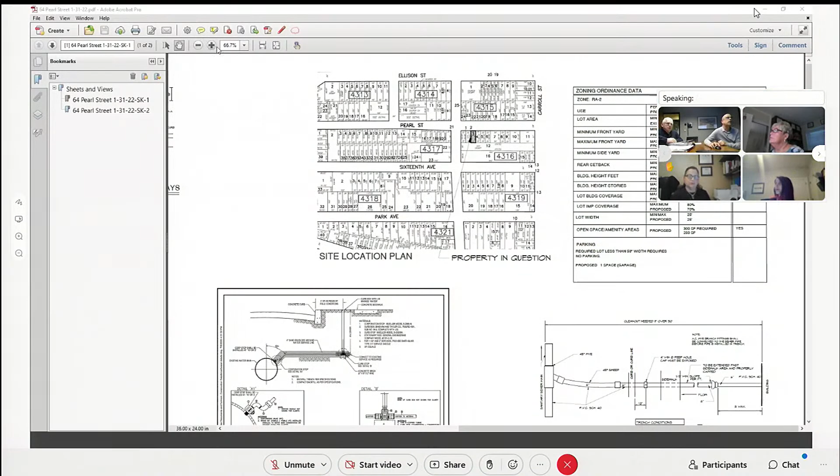Okay, so you can see that, I guess. Plan is visible? Yes, Madam Chair, I see it, sir. Thank you. Okay, as small as we have it, we can see it. I'm gonna blow it up a little in a second.

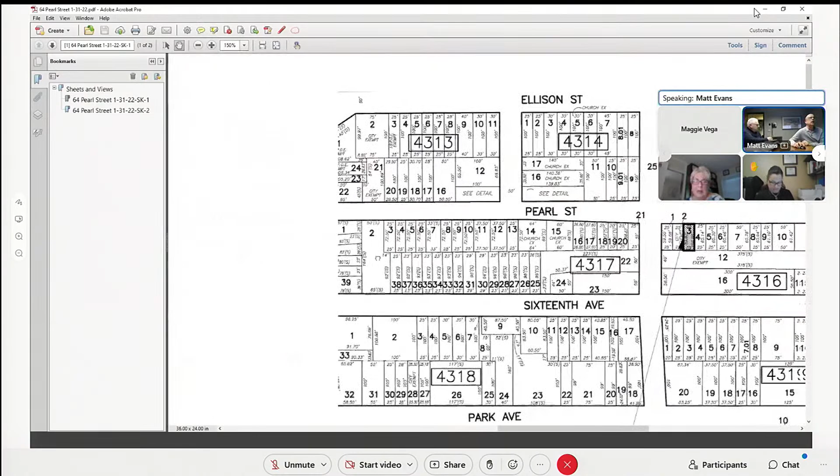The first sheet here is SK1. It has the site location, zoning, some engineering details, and the site plan. So what I'll do is go first to the site location plan. As you can see, it's lot 3, block 4316. And here's our parcel. Next door is a vacant parcel.

And next door to that is a 2-family house. As you can see, 1, 2, 3, 4, 5, and 6 are similar residential lots along the Pearl Street corridor there. And you can see this city exempt property - the Susquehanna Railroad was behind there at one time and it had been vacant. Some of those lots have been taken over, but what we have now is a vacant and abandoned site that we want to redevelop into a permitted two-family unit.

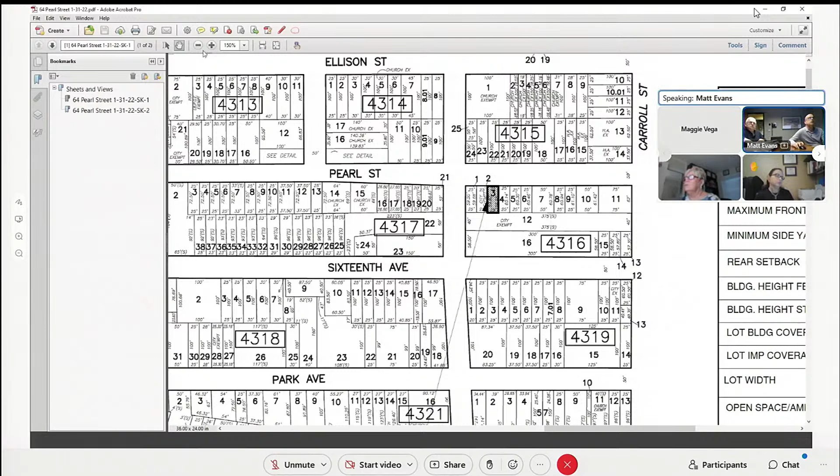With lots under 25 feet, parking is not required, but I'll go to the site plan. Let's see what the site plan is.

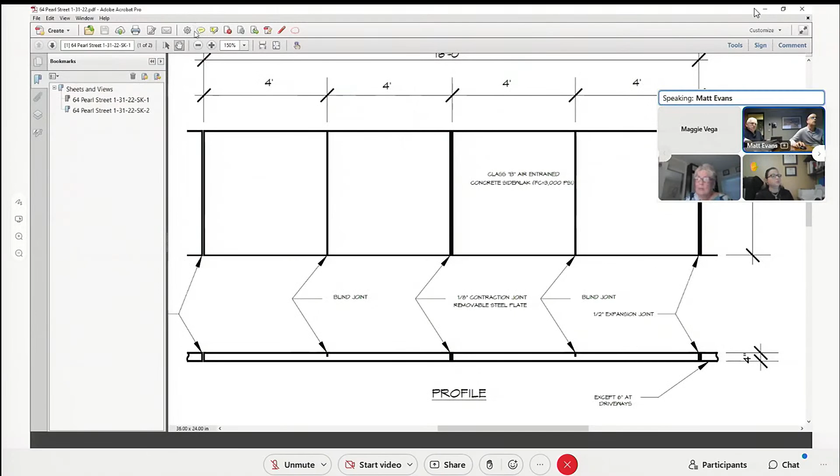Okay, so here's the property, and basically what we have is a 25-foot in width property, and it varies a little bit - it's 59.58 on the right side, 60.14 on the left side. It's about a 1,500 square foot lot, consistent with the adjacent properties.

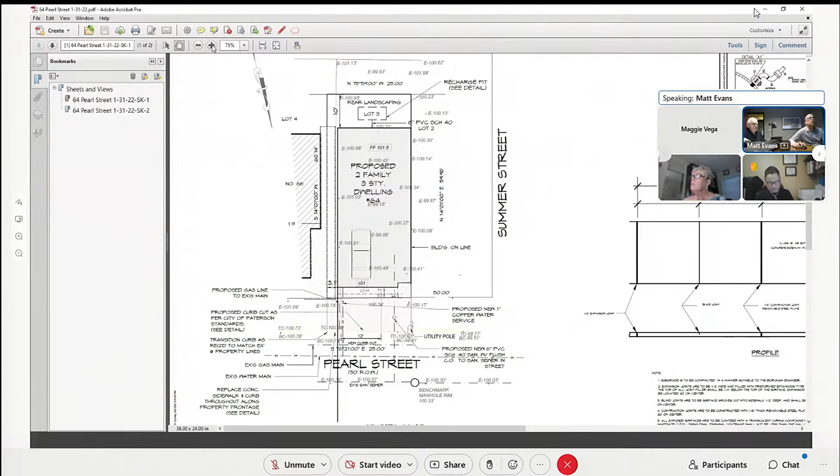We are proposing a single car garage, and that would be in the front of the building. The main building is set back 3.1 feet in the front, but we do have an overhang on the second and third floor, which would be a 2-foot cantilever, leaving 1 foot in the front. So we'd be seeking relief for that 1 foot in the front, but we do have 3.1 on the ground level.

Okay, going to the floor plans. Now this is a little bit different kind of design we've done. If you look at the first floor plan, we have the 1-car garage, and then we have 2 doors in the front. We have the first door next to the garage, which leads down the hallway past the laundry room and the powder room. And in the back, it opens up into a living, dining, and kitchen area with a closet and a mechanical room for that unit.

And then there's a central stair after the garage, which brings you up to the second floor. This unit is a 2-story, like a duplex unit. When you come up those stairs, you have a landing and a hallway, with 2 bedrooms in the front and 2 bedrooms in the back, plus a bathroom and a closet for that unit.

So we have that - 1,010.92 square feet on that level, and then we have 580 usable square feet included in that unit for the lower unit, which is approximately 1,500-plus square feet.

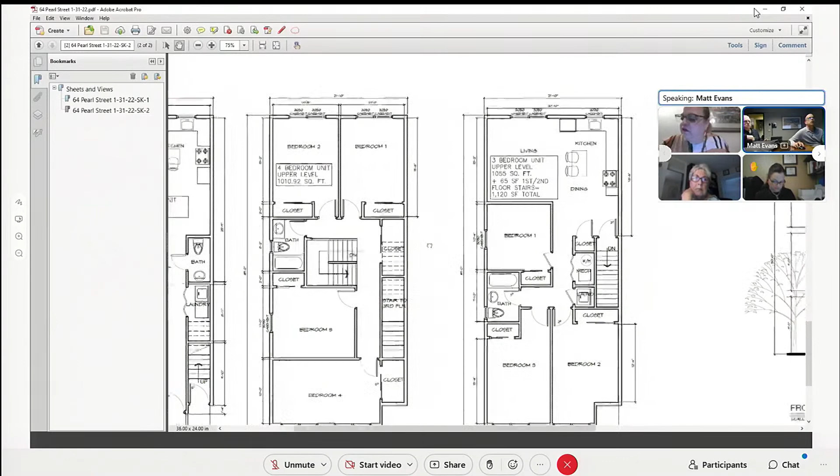So here's the tricky part. The right side door next to the other apartment would be a separate and distinct entrance to the 3rd floor apartment. So you come up the entry stair here, go over, and then you have a landing on the 2nd floor, and then you go up to the 3rd floor through the side, and then you land at the apartment at the top.

So what we have upstairs is 1,120 square feet, which meets the minimum requirement of 1,100 for a 3-bedroom unit. We have 2 bedrooms in the front, a bathroom, laundry, mechanical, and another bedroom in the middle, and then a large open living, dining, kitchen in the back.

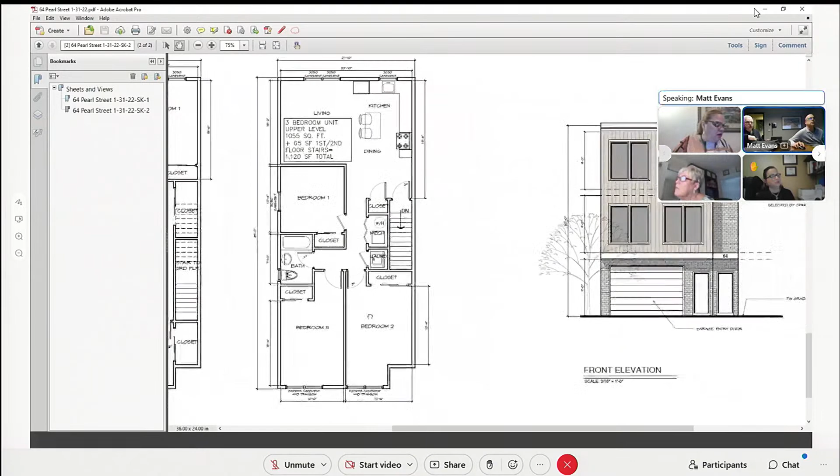So when you come into the unit, it's all public area in the back, and the private sleeping rooms are also in the front. Looking at the elevation, we have the garage entry door and two doors for each unit. We have more of a modern design with vertical siding and brick materials, with a canopy and an awning that stretches the facade of the building, and also a crown along the front of the building.

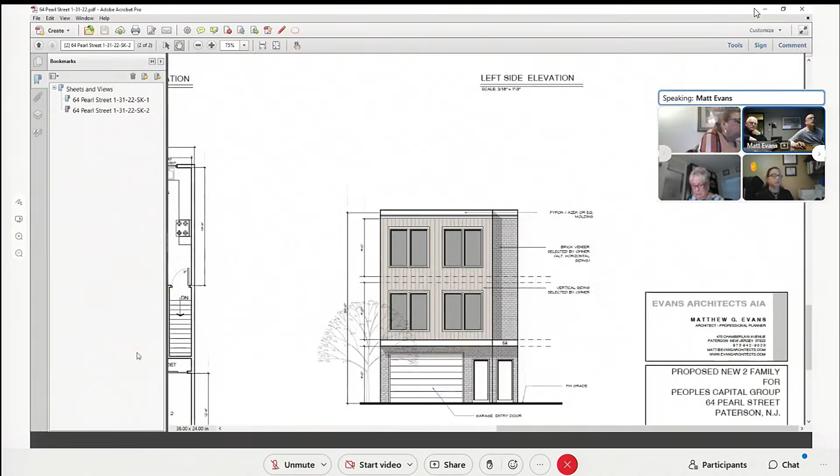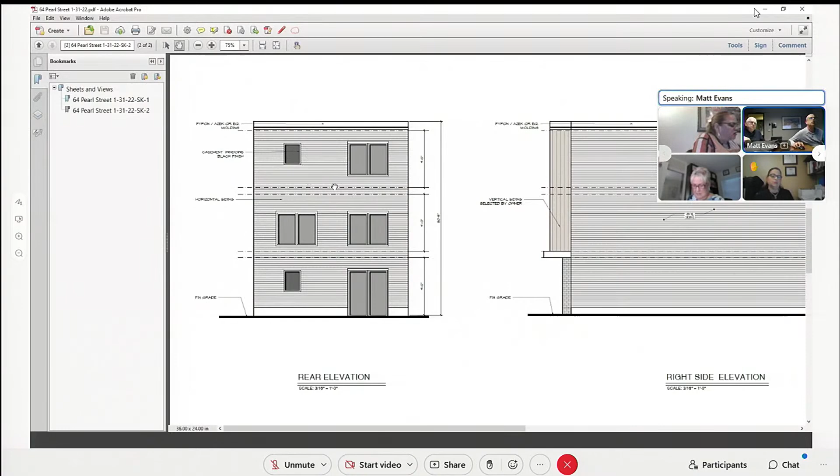That would be the front, and then we have more simplistic elevations for the rear and sides. We have a sliding door that goes out to the rear yard from the first floor garden level, and large bedroom windows allowing a lot of light and air for the units on the upper floors, plus some windows for the bathrooms and bedrooms on the left side elevation. You can see the overhang on Pearl Street, and the siding and different mix of materials.

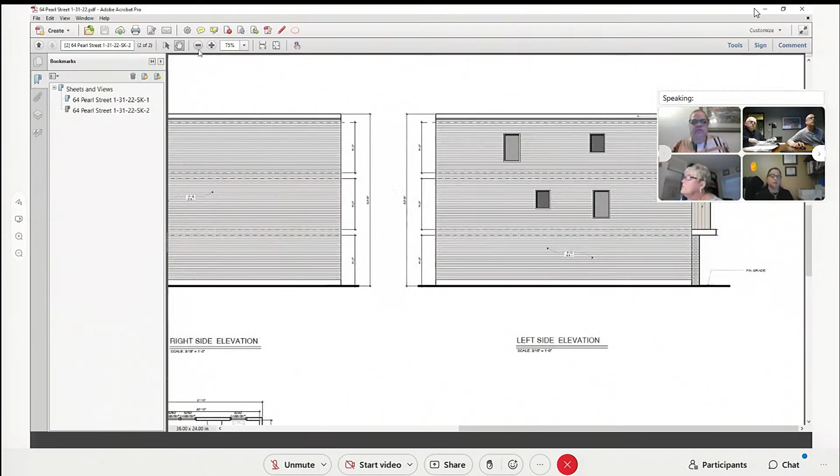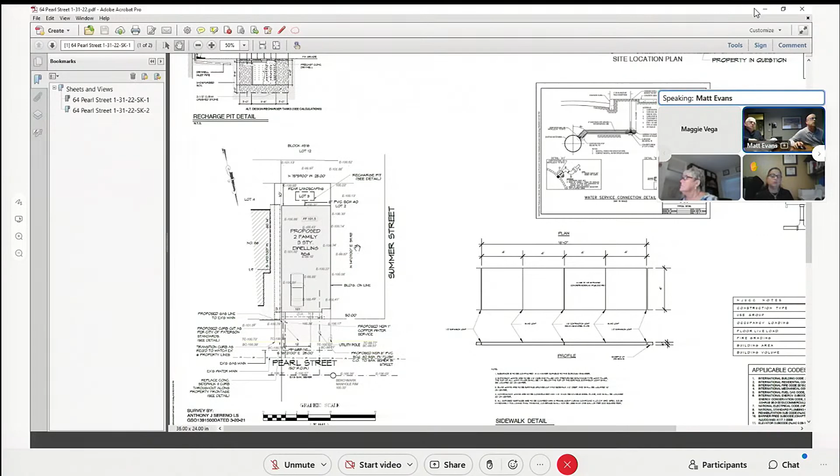So we basically designed this as a custom design for this lot, since it's not really a cookie cutter kind of lot, like a 25 by 100 or similar with these kinds of houses. But the house next door is similar in scale, and the lot to the right is vacant now. There's one more property adjacent to that at the corner of Summer and Pearl. So the house fits in with the RA2 zone.

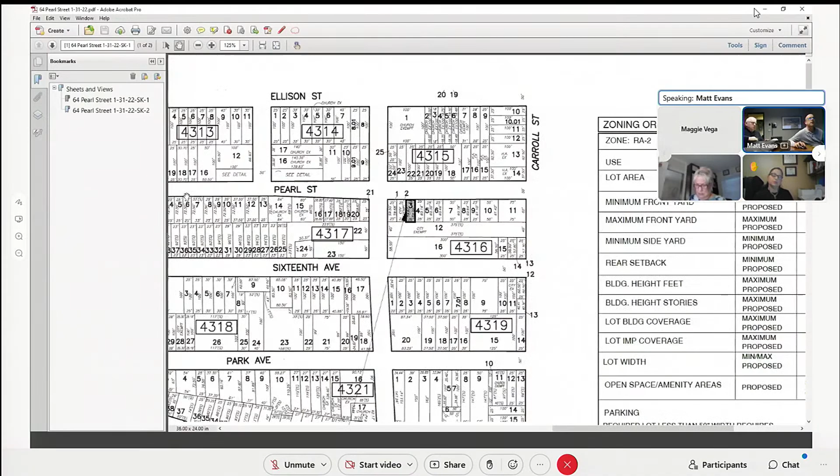We have the zoning data and feel this is in keeping with the redevelopment plan for two-family as a permitted use. The minimum square foot is 2,500; we have 1,500, which is a pre-existing non-conforming condition. As I mentioned, these other lots along the street and down Pearl vary, but they're all very shallow lots.

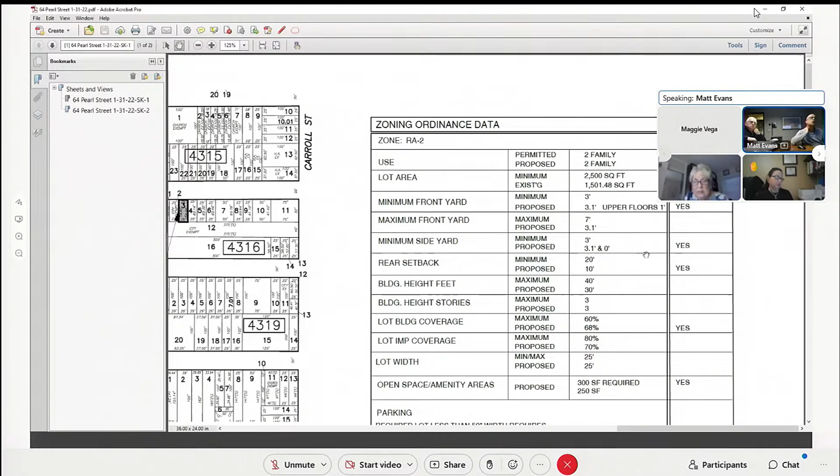We have 3.1 for the front yard setback, but with a 1 foot overhang we'd be seeking relief for that. The side yards are 3.1 and 0 - we meet the requirement on one side, and have a 0 lot condition on the other, which is consistent with many of the dwellings in the area. Some of these other houses have that condition, and it's typical in the area. The rear setback is 20 feet.

We're proposing 10. I believe there's a condition in the ordinance that shows it as a variance, but in the regular municipal ordinance, for every foot you're less than 100 feet, you're allowed to take off 3 inches on the minimum requirement, with not less than 10 feet for the rear setback. We set that as a variance, but it is in the ordinance for those kinds of lots - we're still calling it a variance. That rear setback doesn't abut another house - no, it's 10 feet.

So we have a nice little yard in the back, with the sliding doors and patio - 250 square feet of open space on a small lot. That's at least an amenity for the owner. Our building coverage is very close, given the small lot, so it's a nice little manageable backyard - easy to maintain, easy to take care of.

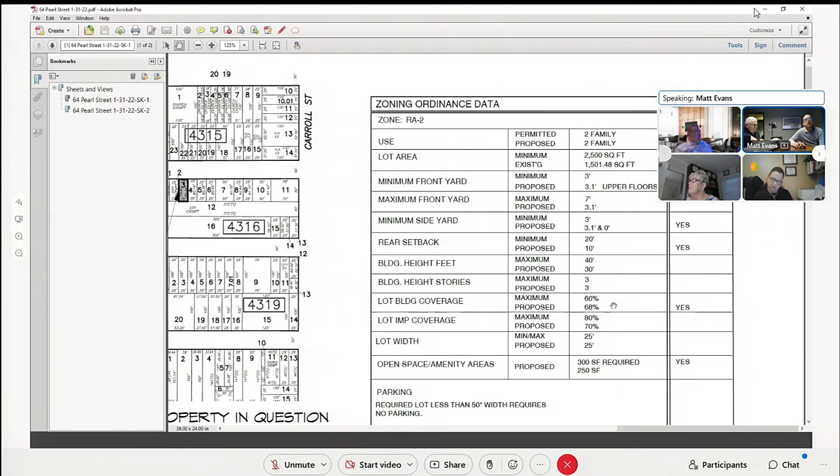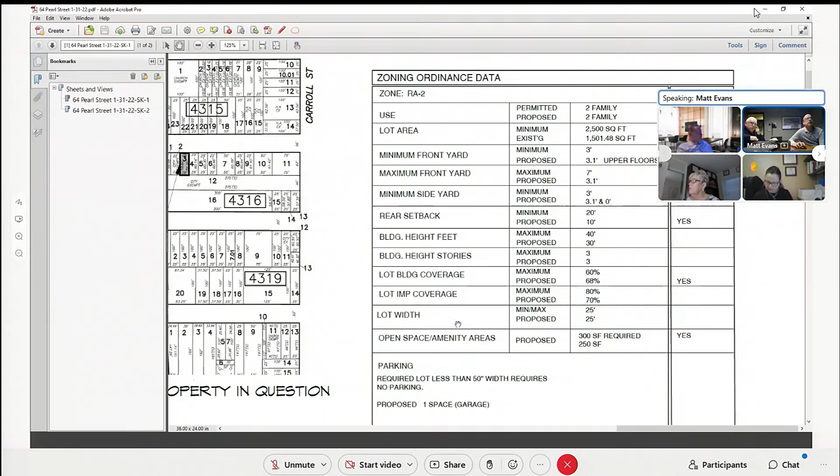Our building height conforms, and the number of stories conforms - we're under on the height, and the stories conform. We're 8% over the maximum building coverage, but given the restricted size of the lot, percentage-wise it's in keeping with the lot coverage of other buildings in the neighborhood. Impervious coverage allowed is 80%, we're at 70, so we don't need a variance for that. Lot width is existing. Open space amenity requires 300 square feet; we're shy 50 feet, so we have 250 square feet, but again it's a smaller lot.

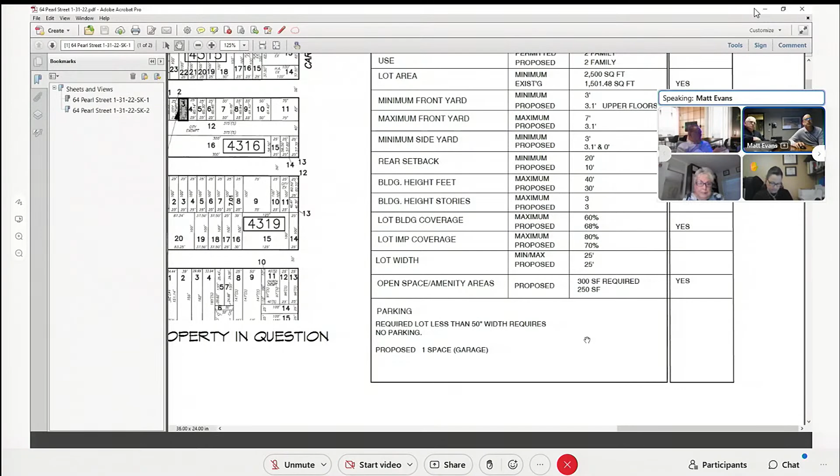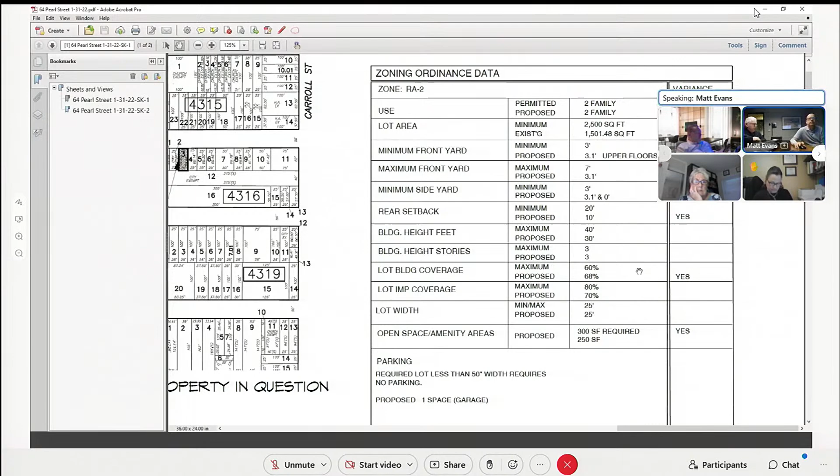The other thing is parking - there's no parking required for this, but we do provide a one space garage for the building. So we actually do provide at least one off-street space, and the planner touched upon the other developments occurring along Pearl Street. So in your estimation, from a planning perspective, given this lot size, is this a suitable continuation of that redevelopment?

We believe this has a positive influence on the surrounding area, taking the vacant lot out of existence. By removing a vacant or abandoned lot, we're putting in infill housing consistent with the redevelopment plan and its aesthetics. I think this is a successful transformation of that property and the neighborhood.

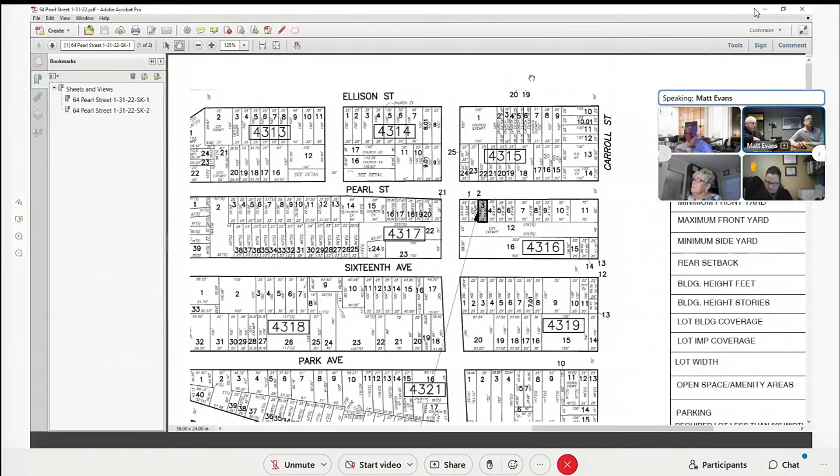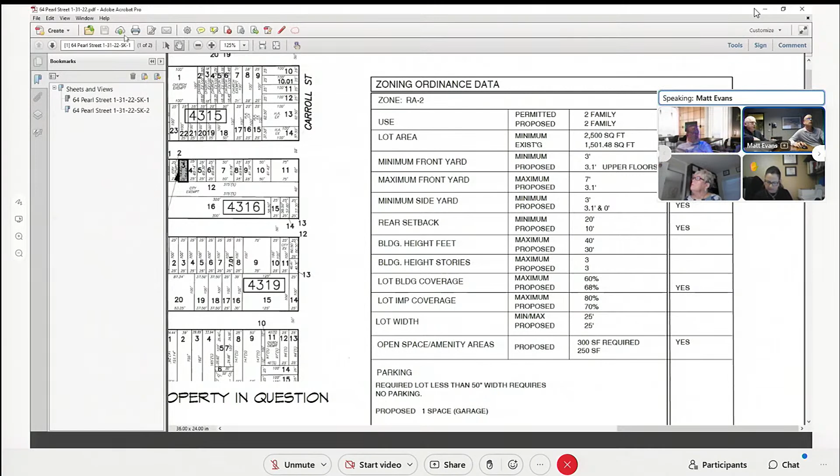Also for the record, this is not direct testimony, but we have no problem, Commissioners and Madam Chair, with your planner's recommendation that there be a deed restriction so this remains only a two-family dwelling, with the first and second floors occupied only by one family. This type of development, as Mr. Evans has provided, gives a family with a couple of children the opportunity for a nice quality of life in terms of number of bedrooms.

That's your goal here, right? Yes. Okay, so that's all we have with Mr. Evans at this time, Madam Chair. Your other witness is the owner of the property? Yes, just Mr. Martinez briefly.

Okay, then I'd like to have him sworn in, please. Sure. Do you swear or affirm that the testimony you're about to give us is the truth, the whole truth, and nothing but the truth? Yes? I have trouble hearing you.

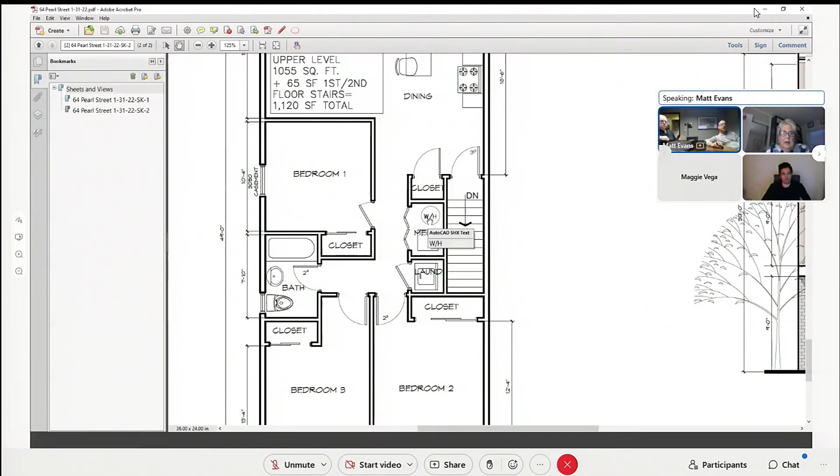Yes, each unit gets one. Let me share my image again. So, going from the third floor plan to the first floor - the first apartment has a side-by-side laundry next to the garage for the right unit. And then on the third floor, we have a stackable unit next to bedroom number 2. We have separate mechanicals also.

Okay, all right, that's good. Okay, let's wait to see if we can hear from the owner. This is the same sound I heard before, so...

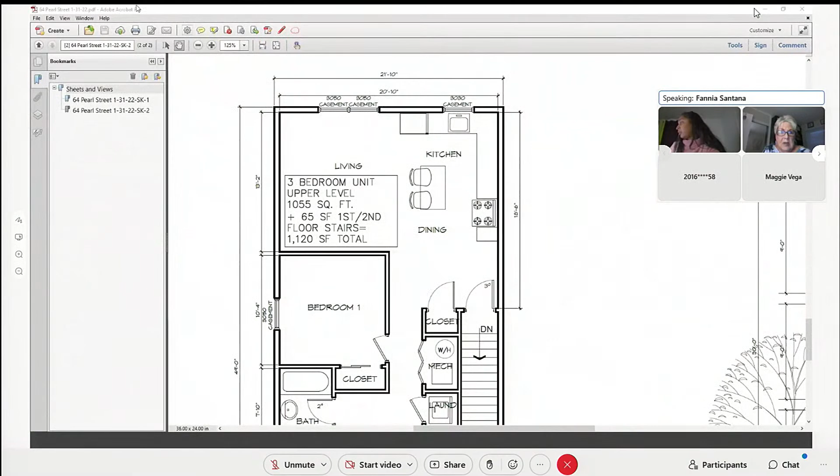This is Commissioner Santana, I have a question. Go ahead. If we go back to the front yard variance, I don't know if Mr. Evans can go back to the site plan.

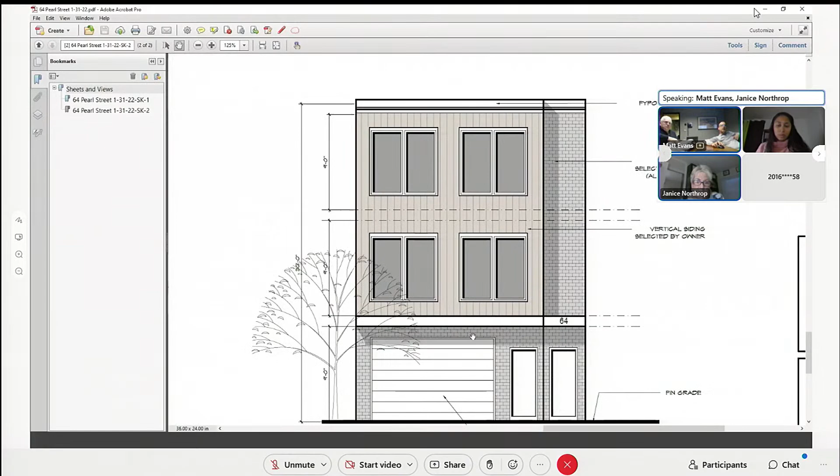Can you show her the side view? Oh yeah, sorry. Because that would show you where we're talking about. We'll see the shadow line on that. And then we go to the side, and then you can see. There it is. Okay, so it's not a ground level setback, in other words.

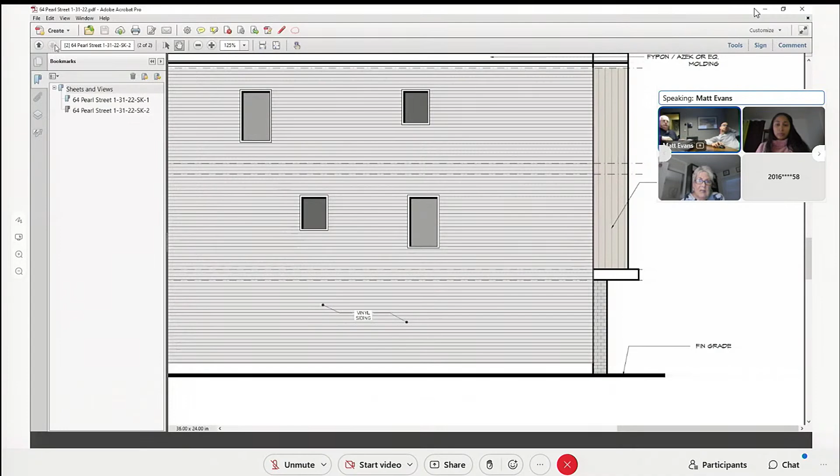So just to double check, there's no variance for front yard, right? There is, yes, based on the upper floors only. But in reality, the ground level is the crucial setback element, and it does not create a ground level setback. So, in essence, there is a variance, but it's because of the second level and how it juts out a little bit, and the third level, okay? All right, thank you so much.

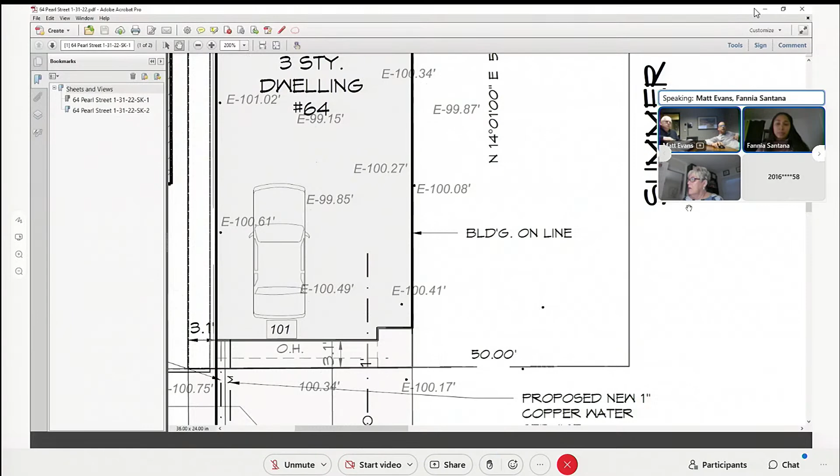Just one more question. Yes. So there's no basement, right? No basement, slab. No, it's basically what we call slab on grade. There's no, whatever the first floor is, that's where we start. All right, so it's at grade, and then the back is just grass, rear yard, patio. All right, perfect, thank you so much.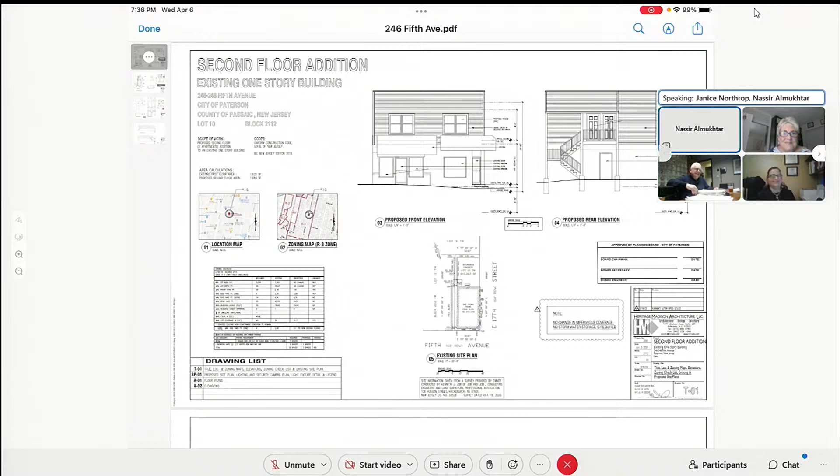Do you see the screen in front of you with the drawings? Yep, small as it is, we can see it. Okay, I'll try to zoom in. You can, yeah, zoom in by section.

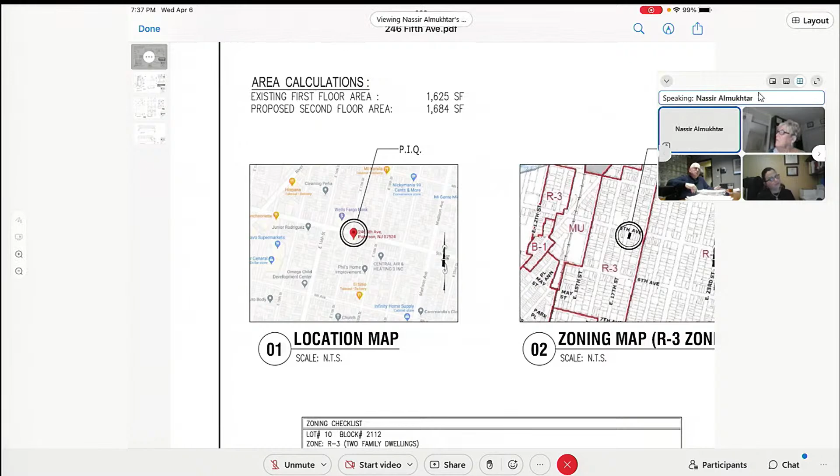That's fine. So first, this is an application to add a second floor. There's an existing grocery store on the first floor, a one-story structure, and we're proposing to add 2 one-bedroom units, almost the same footprint of the existing structure, except we had to bring it back a little bit, so there are some minimal changes so that we can open some windows as far as setbacks to satisfy the building code.

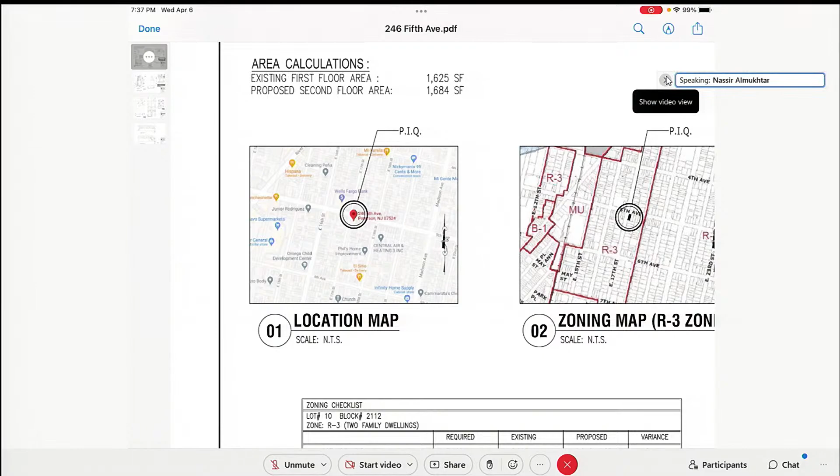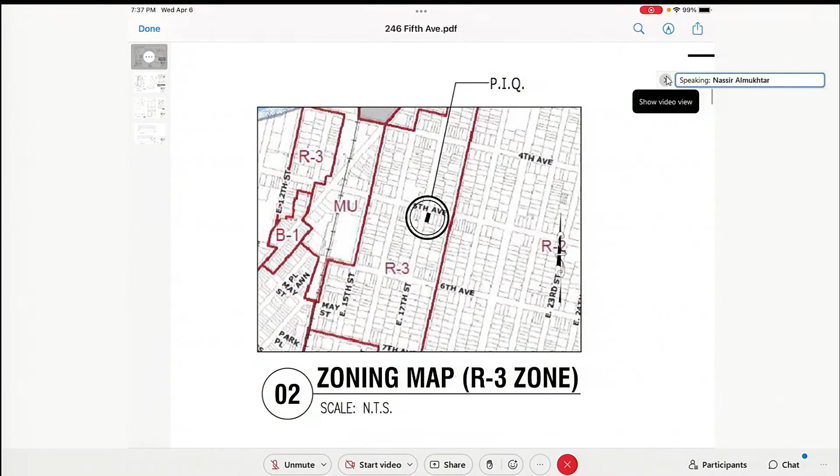This is located at 246-248 Fifth Avenue. As Mr. Marconda has alluded to, the corridor of Fifth Avenue is mixed multifamily, with some commercial uses and some grocery stores, very diversified. This is the zoning map. It's located in the R3 zone, mixed medium and heavy residential. And as Ms. Farsbud has mentioned, this is a permitted use to have second floor apartments and residential with first floor commercial.

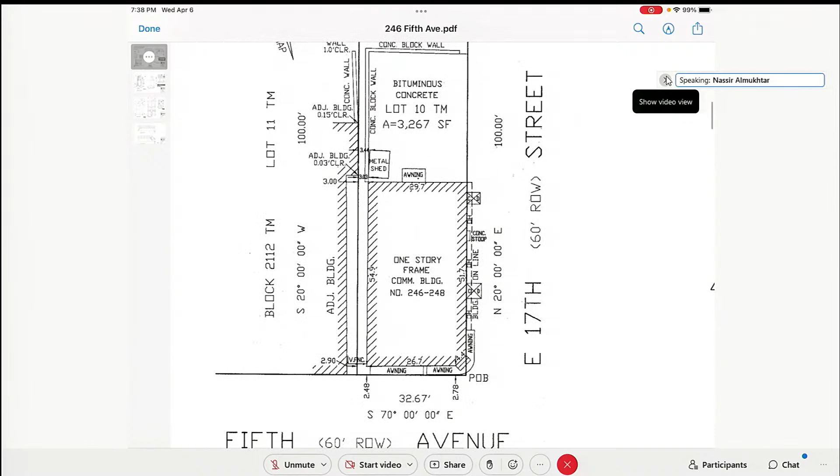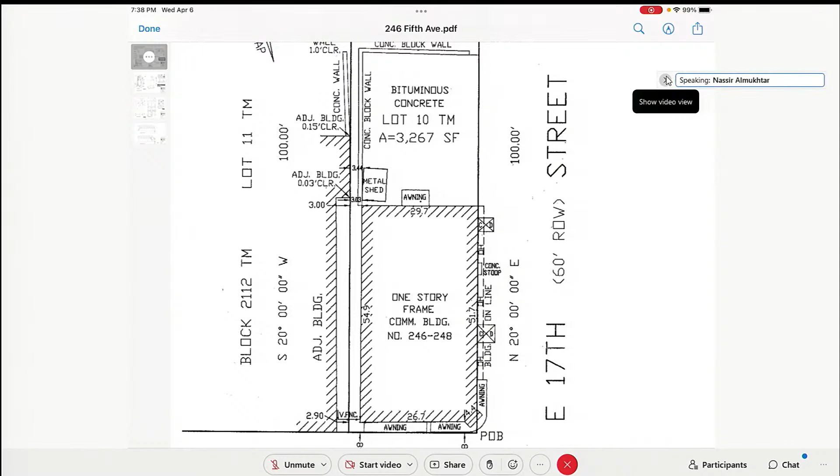This is the site plan as it stands currently. It's on the corner of 5th Avenue and East 17th Street, the southwesterly and southeasterly corner. This is the one-story existing grocery store. Behind it, there's a bituminous concrete area, which we're proposing to use for some parking spaces, removing the metal shed, and providing a set of staircases in that rear portion for access to the second floor units.

So these parking spaces, excuse me Nassir, did not exist prior to this design, is that right? It's a paved area. Some of it was parking, some of it was a metal shed. We're trying to clear that space to provide access to the second floor and to provide some more organized parking. So you upgraded the existing parking that was not up to standard. That's correct. And the shed is gone. Will be gone, yes, that's correct.

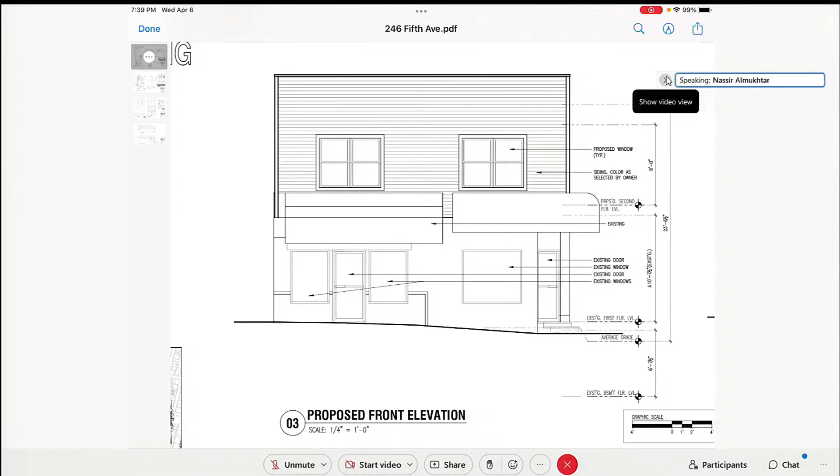So this is the front elevation. There is access to the store on the first floor, and then the second floor is an addition with horizontal siding, a simple addition with 2 simple units. This is the rear elevation, and this is the proposed set of staircases. It will be covered to provide protection from the elements, and there are 2 separate entrances so that each unit has separate access.

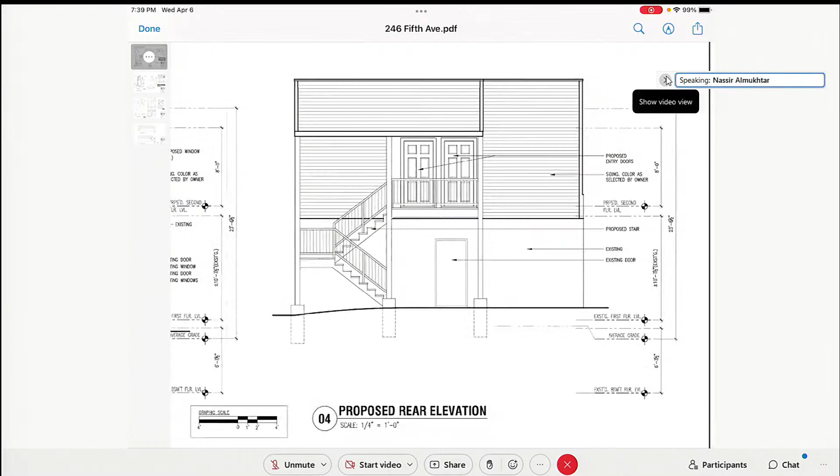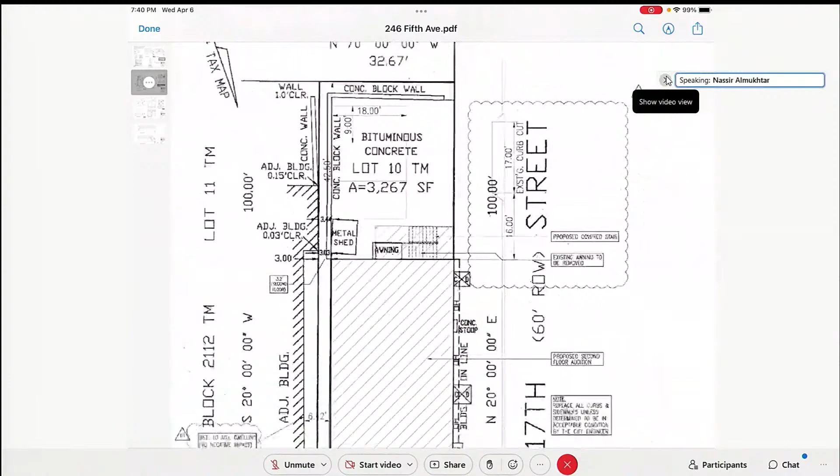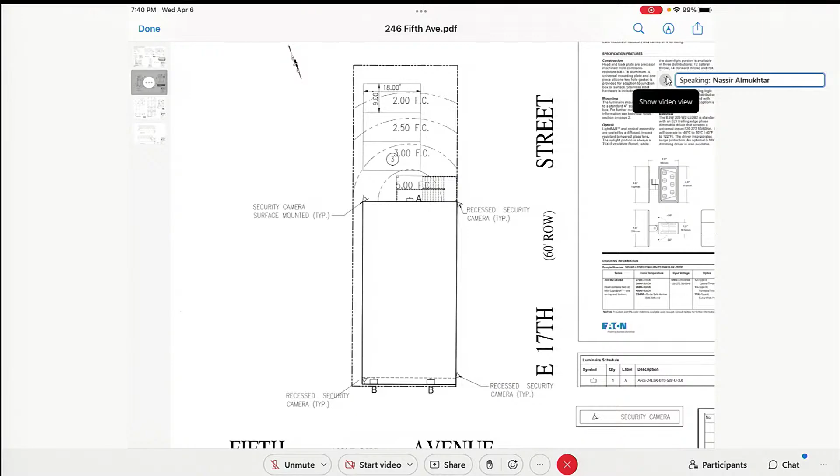Moving on to the proposed plan, we are using the existing curb cut, a 17-foot curb cut. The metal shed would be removed, as I mentioned, and the staircase is shown here, with 3 parking spaces provided to the back. There will also be security cameras throughout the property on 4 corners, and a light added to the parking lot to provide sufficient lighting for access to the apartments and the parking area. This is also a detail of the LED lights we're proposing to use to light up the parking lot.

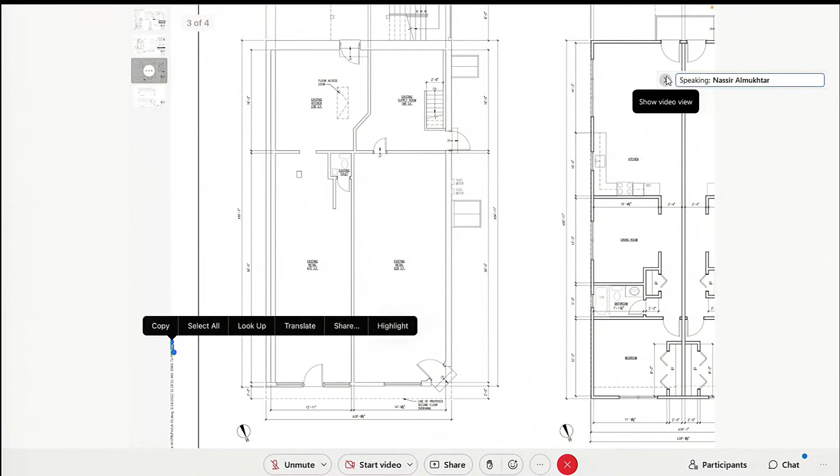This is the first floor, indicating the existing commercial use for the 2 stores. Then the second floor has 2 separate apartment units, each 1 bedroom, with a dining room, kitchen, and living area. And then we have the basement, with no changes proposed to the existing basement floor.

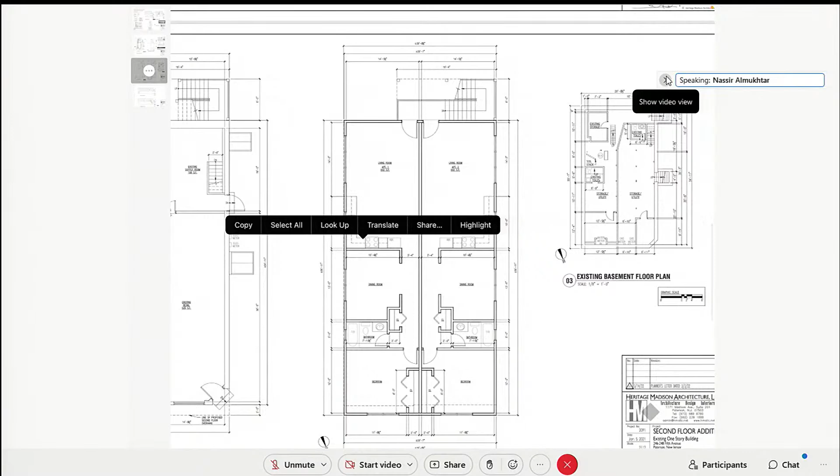So basically, sorry, I didn't mean to interrupt Nassir, but that basement space is utilized just for the benefit of the grocery and restaurant area, is that right? That's correct, it's strictly for the commercial use. They have their own access and use it for storage and such. Right, and I guess bathrooms for customers or employees. Yes, that's correct.

No problem, so that's what I was going to mention. The basement has no change proposed, and no change proposed to the first floor either. It's mainly adding to the existing footprint of the structure just to add 2 one-bedroom apartments. Most of the bulk variances are pre-existing conditions, and the setbacks are not changing.

Mainly the variances are not changing. One of the variances is the smaller lot that is required. We're required 5,000, we have 3,267, but those are pre-existing conditions that are there currently.

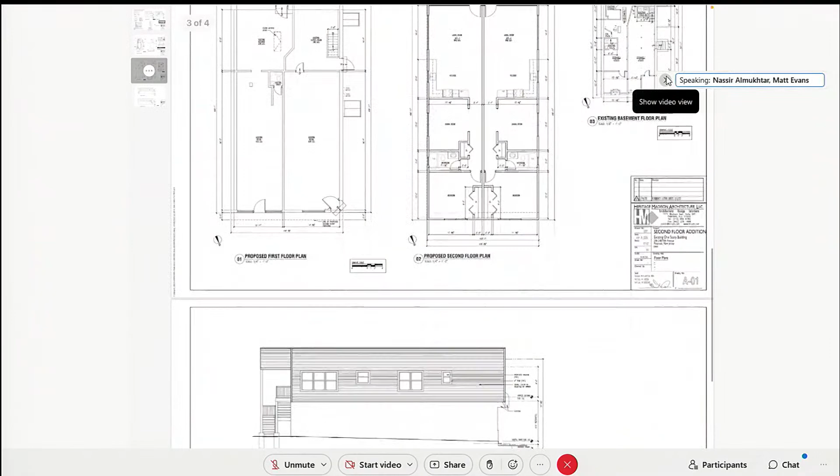And as you move along the 5th Avenue corridor, are there similar lot sizes up to this one? Yes, pretty much, yes.

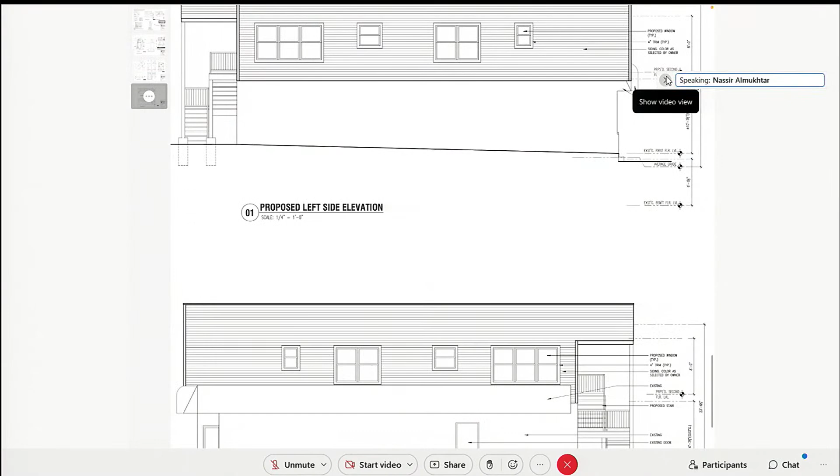And then we have the two sides, the left side and the right side. That's where we indented the second floor a little bit so that we can open some windows and provide light and air for the apartments. And we're proposing siding for the second floor addition.

So that's basically it. Okay, then setbacks are all based on pre-existing conditions, correct? Pretty much, yes. And again, lot coverage as well, which is only about 10% over the requirement as it exists. And we're providing three good, clear parking spaces for the residential units?

The anticipation is 1-bedroom units usually used by local people who work in the neighborhood. So the anticipation is that those spaces will be mainly used for the grocery store and the restaurant, not for the apartments.

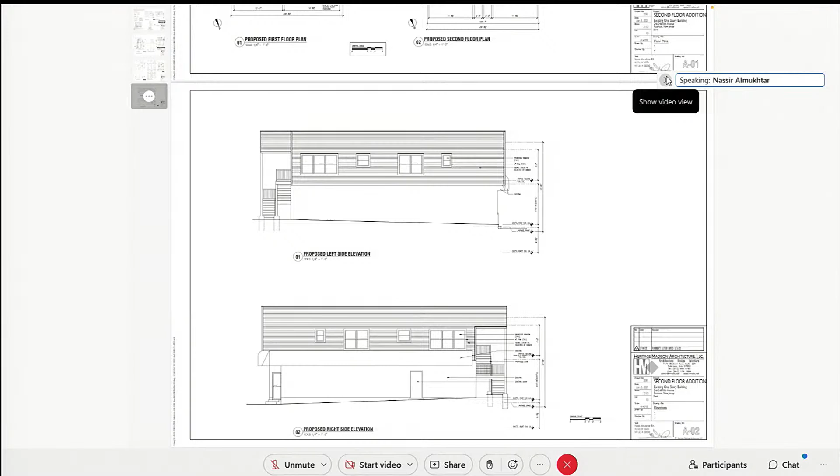But in any event, that could be something the applicant and the tenants, the commercial and residential tenants, can work on to mutually share, or use those spaces as needed depending on the hours of the day, correct? Yes, especially for overnight parking, if required. The commercial uses will be closed then, and those can be used for the units, correct? Correct, that was our thought, and I know the applicant would agree with that. Yes, that would be fine.

Also, with regard to the 1-bedroom units, do they comply with square footage requirements? That's correct, yes. Okay, and we talked about the area being a mixed-use corridor.

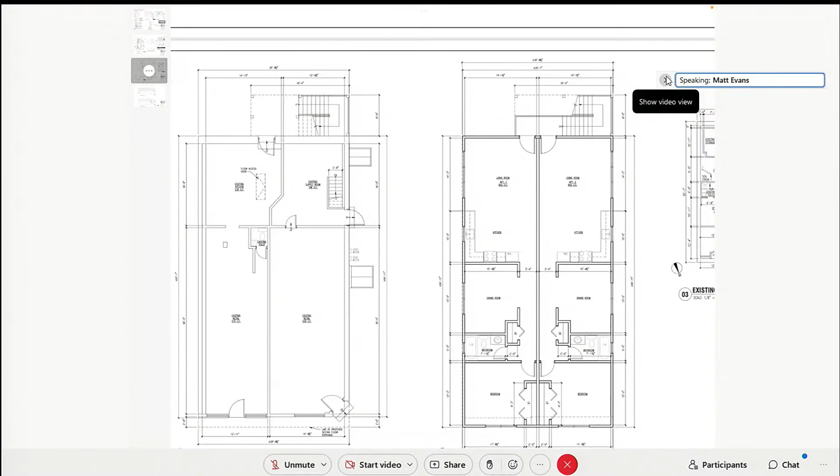5th Avenue, East 17th Street is a regular bus stop as well, which the public can access. Is that your understanding as well? Yes, that's a regular New Jersey Transit crossover to River Street.

And in terms of the square footage of the units, we're required to have 600 square feet minimum. We're providing 842, so it's a good size.

And there are other mixed-use buildings along 5th Avenue which have pre-existing residential uses above. So we're similar to those? Very similar, yes.

And this would also require a Passaic County Planning Board review on a county road, correct? That's correct, yeah.

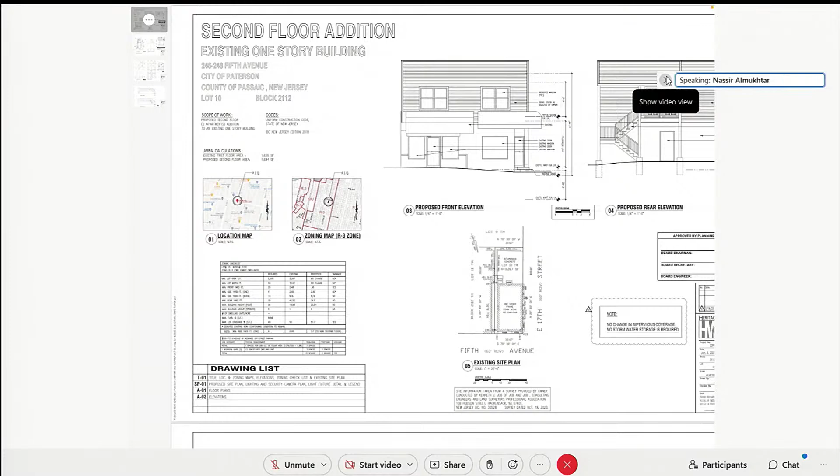I don't anticipate any problems with the county because our ingress and egress, the vehicular access, is off of 17th Street, so I don't think we should have any problem with the county. Right, we're not changing any curb cuts or ingress/egress on the county road, correct? That's correct.

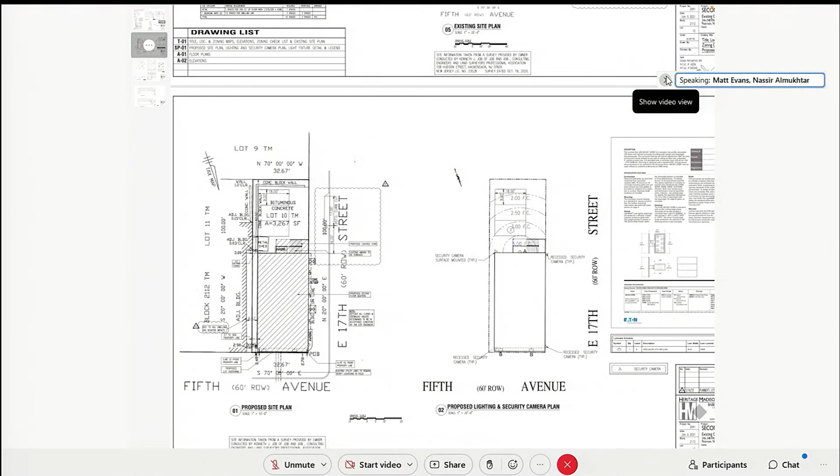With regard to designating a refuse area and recycling, I'm sure the business use has a plan. Do you show that on your plan, or is that something we would need to provide? We can provide that, that's no problem.

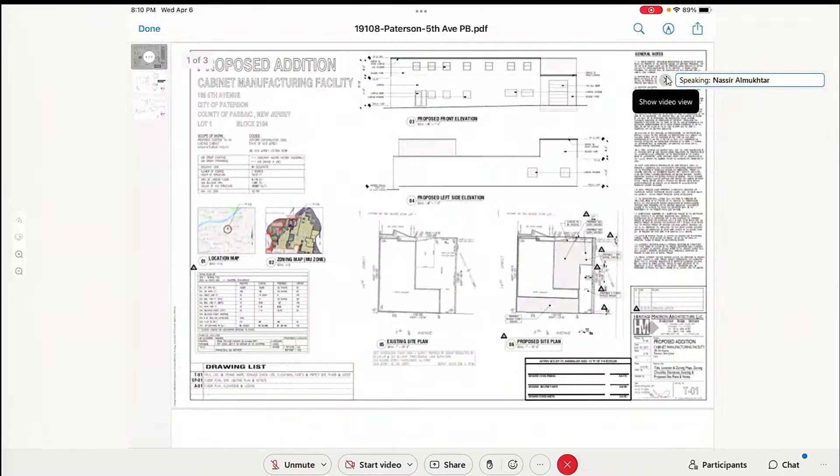Sure, I'm going to start sharing if I may. You see the drawings in front of you, Commissioners? You do? Okay, perfect.

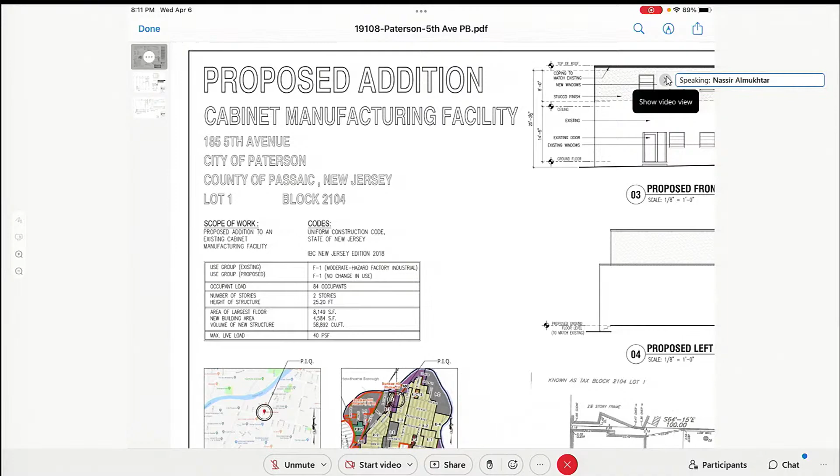So this is an existing cabinet manufacturing facility. It has been located there for a long period of time. It's located at 185 Fifth Avenue, in the MU mixed-use district, on Fifth Avenue.

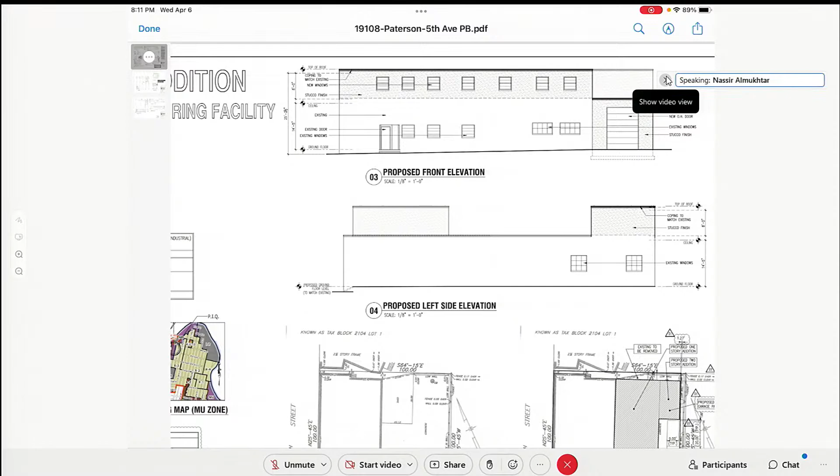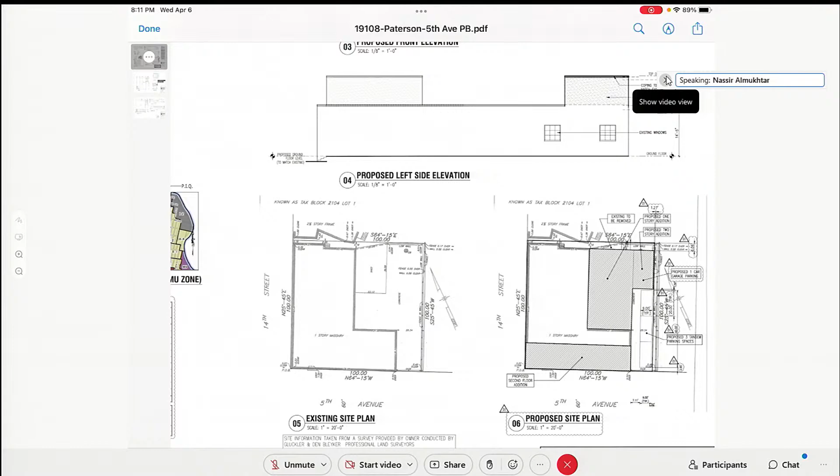The proposal is to add a second floor above the existing first floor, as well as removing an existing storage shed, providing some much needed space for the manufacturing facility. They are doing well — they do a lot of cabinets throughout the tri-state area, especially New York City, but they want to stay in Paterson and in this facility. They're happy with this location. They have new, very advanced machinery there, and they do need the space.

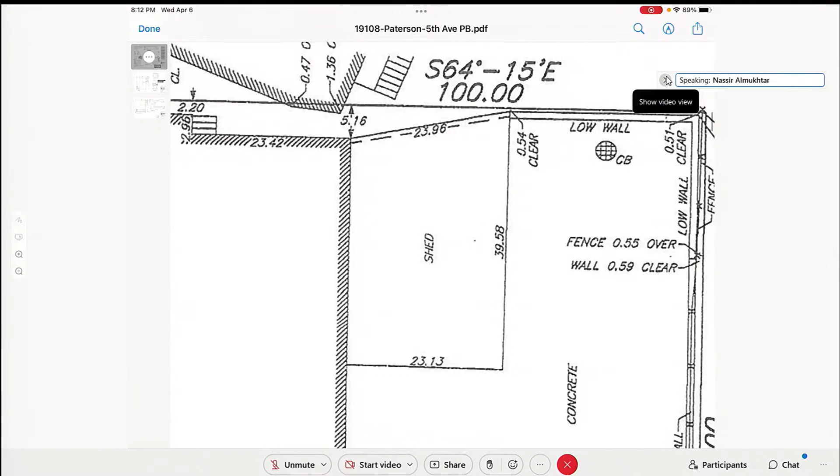This is the existing site plan. It's an L-shaped, one-story building. There are some offices towards the front, and the proposal is to remove that and include it into the work area, which is much needed. There's also a shed towards the back, or towards the side, that will be demolished, and the proposal is to add an addition there to square off the work area. I'll come to the floor plans in a moment, which will give you a better view.

On that L portion, there would be a garage for their vehicle, and above that garage there would be additional storage space for their materials.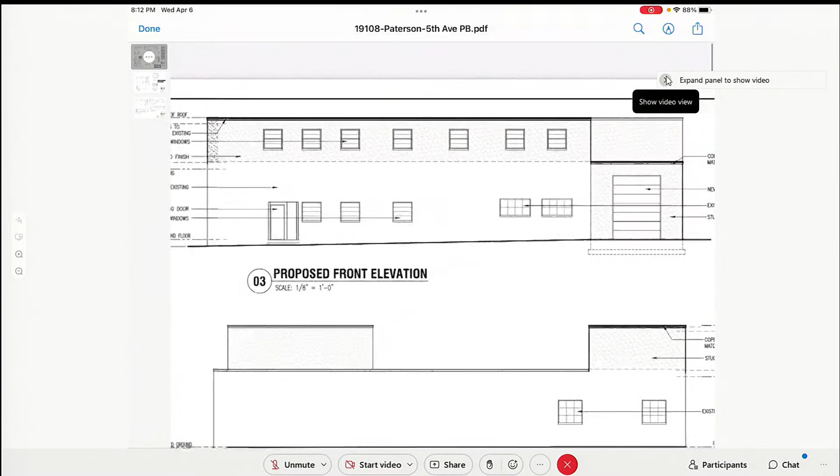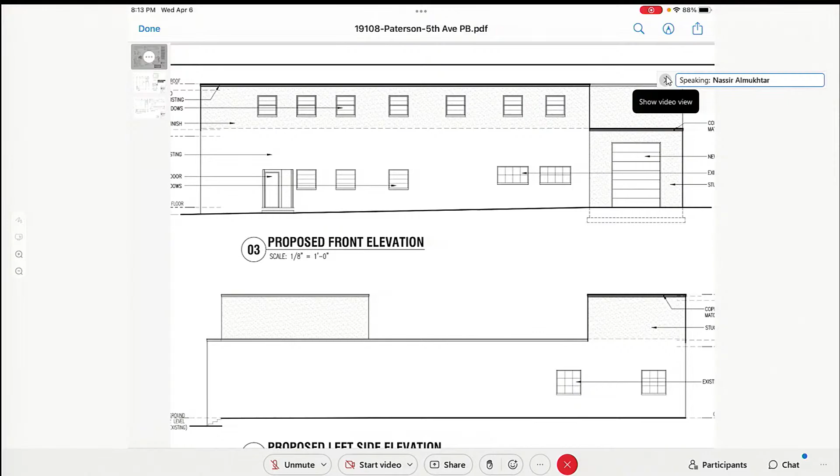This is the front elevation. The overhead door on the right side is for the proposed garage, and above it would be that storage space, accessed from a set of stairs from the work area. On the second floor, we're proposing to add a couple of offices so they can have their meetings if needed, separate from the work area on the first floor.

Moving on to the floor plan — the hatched walls are the proposed addition. We have a proposed 570 square foot garage for their vehicle, and behind that garage a staircase that goes up to an area above the garage used for storage, accessible from the workshop area. We're removing a lot of the interior walls so they can have free-flowing production lines with sufficient space for their newly purchased equipment.

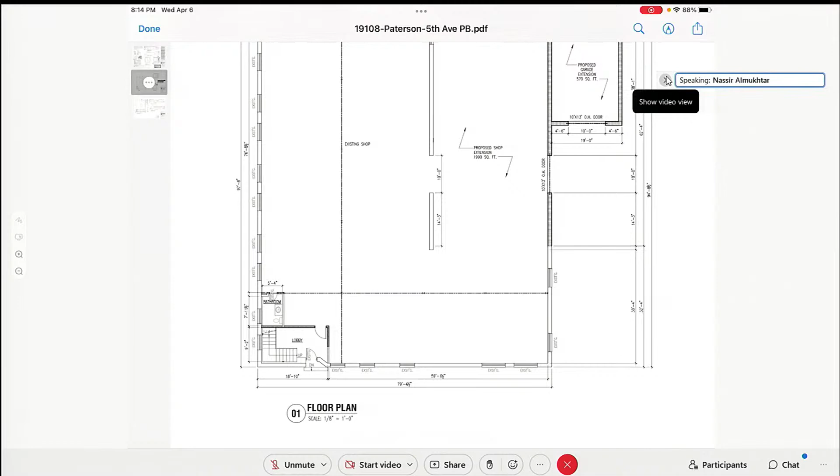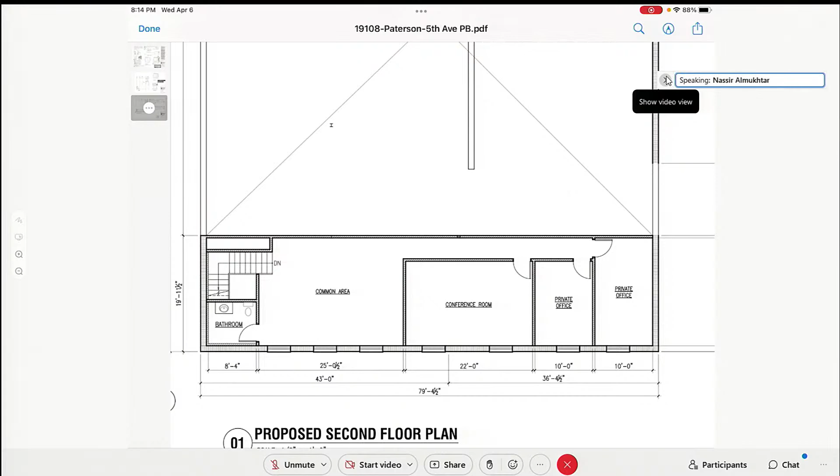There's an existing entrance here that we're enclosing for a lobby, which would have a staircase going up to the second floor. That floor would have a common area, a bathroom, a conference room, and two private offices facing Fifth Avenue. Also on the second floor is the storage room, directly above the proposed garage. As far as the elevations, there would be all stucco.

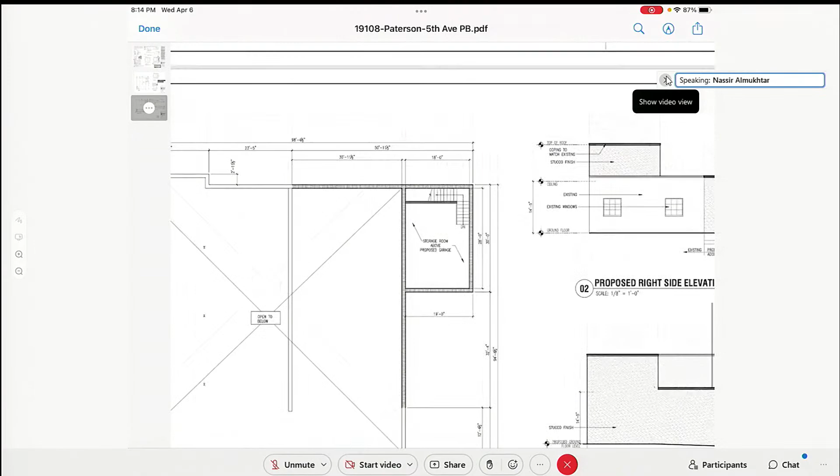Going back to the first floor workshop, we're proposing a 10-foot by 13-foot high overhead door for deliveries. I believe Ms. Farsgood mentioned the access for deliveries — I discussed that with the applicant, and deliveries are always conducted before work hours, so parking will not be used. The entire driveway and the parallel parking spaces would be available for the delivery truck to come in.

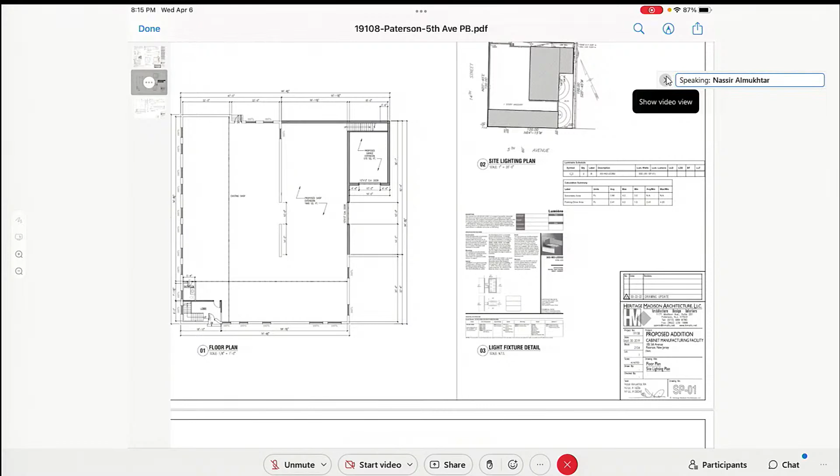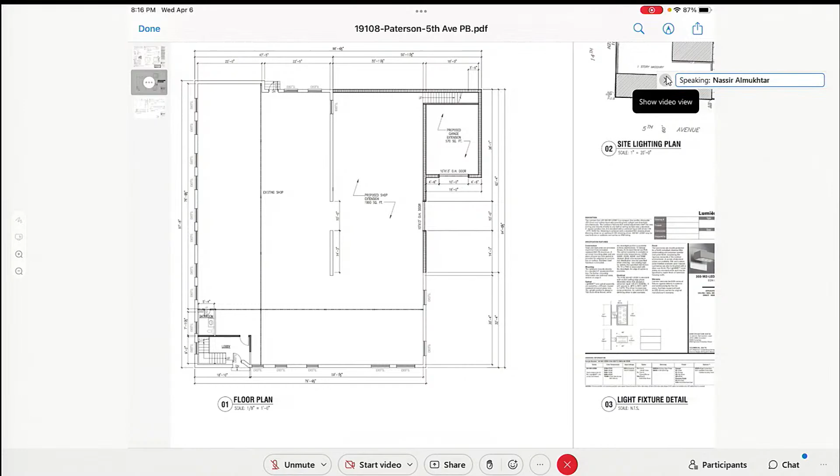As far as turning, the overhead door would go up and the delivery vehicle would go in. They can make the turn, back up into the on-site turning space, and then come out onto Fifth Avenue, so we do not anticipate any traffic interruption on Fifth Avenue. After the delivery is finished and work hours start, the parking spaces are clear and can be used for parking.

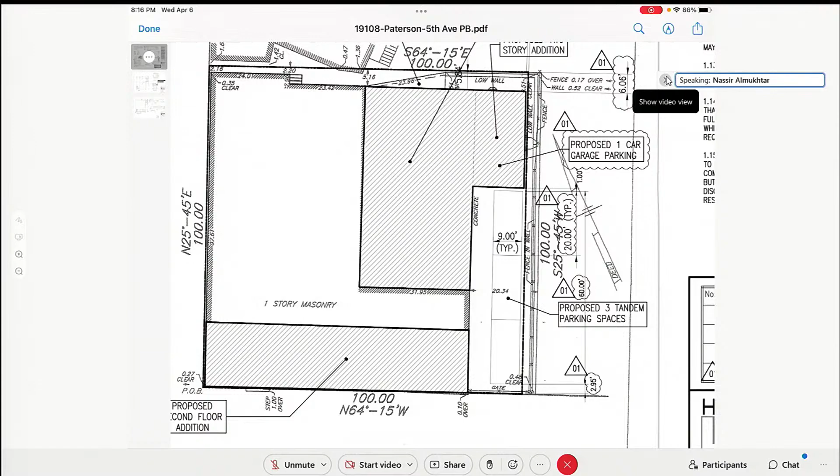As far as the lighting, we are also proposing to provide some LED lighting to light up the driveway and the parking area. And then we are proposing to have, again, 4 parking spaces, tandem parking spaces. It's a little bit tight, but this is a manufacturing facility. It will be used only by the owners, not retail space. The workers there are all locals using mass transit. They don't have any cars. So although the driveway width is a little bit short, it is doable. Given the tight space they have now, I think the expansion is more important than providing fully compliant parking spaces, but the way we are proposing does work with what they have.

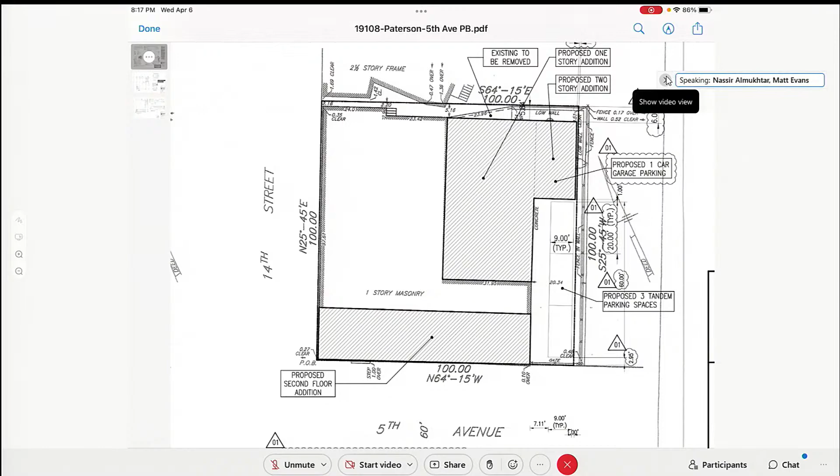And then the elevations would be simple elevations with windows and stucco finish.

So would that conclude your testimony, or do you have more? Yes, that's basically correct. Okay, again, so in your estimation, based on the zoning chart, there's no changes or variances created that create any negative impact on the surrounding buildings or businesses? Correct. On the left side there's the railroad tracks, and on the right side there's a car dealership, a used car dealership. There's no negative impact there. As you alluded to, Fifth Avenue is a bus transport corridor as well as River Street, which is right close by, correct? Yes, that's correct.

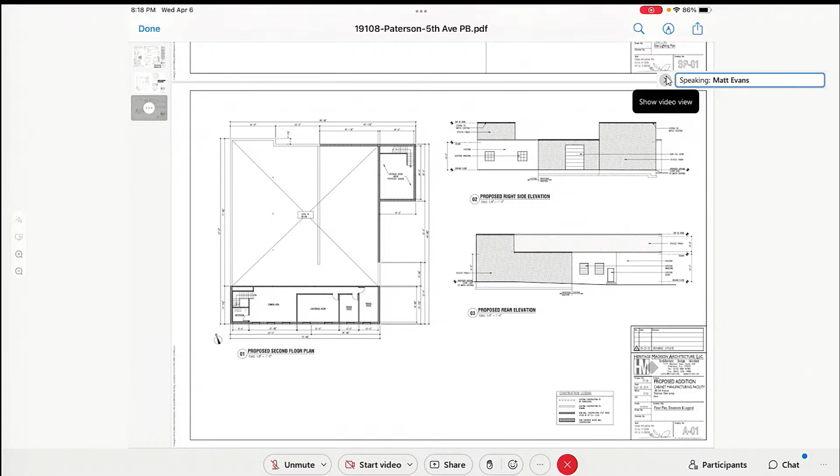I'm not sure if it's Sal or one of the other principals that's with us. I see someone called Sahil Dunya. Dunya. Oh, it is Sal, okay. Yes. Okay, camera, please. Yes. Please raise your right hand. Do you swear or affirm the testimony you're about to give is the truth, the whole truth, and nothing but the truth? Yes, I do. State your full name for the record. Suhail Dunya. Souheil, and last name is Dunya, Dounia. Sir, can you spell your first name again? Souheil. Thank you very much, sir. My pleasure, man.

Okay, Mr. Dunya, good evening. You are one of the principals of Fifth Avenue Millwork LLC, correct? Yes, sir. And as such, you're fully familiar with this project. You've been working with Nassir and with my office, and you agree with his testimony? 100%, yes. All right, and you guys have been in business there how long now? 8 years. And prior to you, there was a similar business, or were you aware? No, it was a different business. But anyway, you've been continuously there 8 years and functioning very smoothly. Yes, sir, very well. The application is intended to give you more workspace, essentially, to continue to function the way you are. That's very true, yes. And there's no retail visitors on site whatsoever. Not at all. We have another office in Paterson also. We conduct our administrative work there. Right, this is where you do the actual physical operation. Exactly. And you have Paterson employees who either walk or use public transportation? Yes, sir, they do.